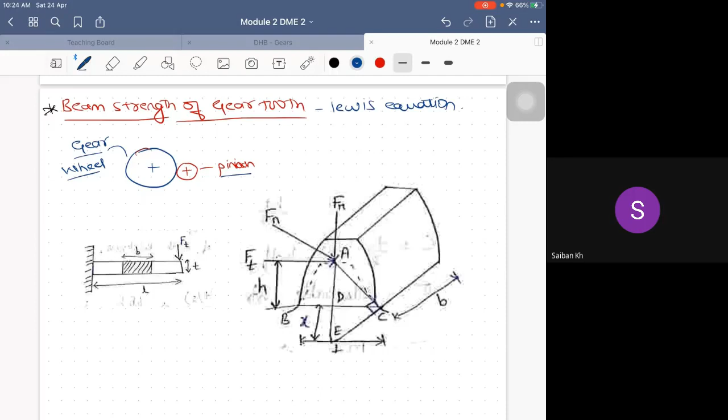I told you there are two different wheels which turn, rotate one another. Those are known as gears, as we have discussed in the last class. The bigger one is called a gear wheel, and the smaller one is called a pinion, irrespective of whether it is driving or driven. Which of these two wheels, according to you, is more stressed up? I mean, more forces it has taken, more load out of these two gears. So whether it is a gear wheel or a pinion, according to you, will be having more impact or more load content? Pinion, isn't it? Because it is small when compared to the gear wheel. If it is driver also, driven also, the pinion will be under more load. So the pinion would take more amount of load cycles. Therefore, all the design calculations most of the time will be based on pinion. Remember this - all the calculations will be based on the pinion wheel since it is taking the more load.

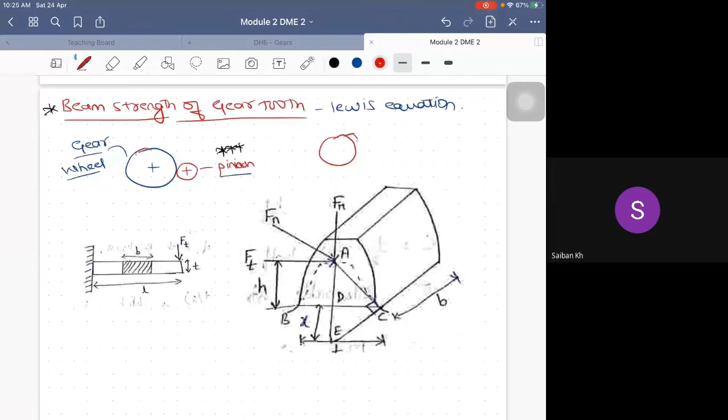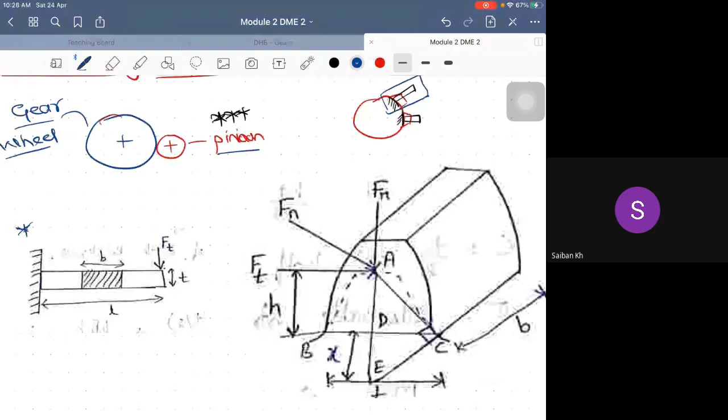So in the Lewis equation, what we will do is, I have considered a pinion. Now I will just draw a pinion like this. The pinion has n number of gear tooths all around it. So while analyzing the Lewis equation, what we'll be doing is we will be analyzing in such a way that every tooth is a cantilever beam. For example, this particular tooth is a cantilever beam, and this particular tooth is a cantilever beam. Every tooth, it goes on for every tooth. Now, what we will do is we will take only this particular cantilever beam and analyze the things. Got it, everyone? So every tooth would be considered as the cantilever beam. That's great.

Now, let us try to analyze the various forces which act on a gear tooth. Suppose this is a gear tooth of a gear wheel, and this is a pinion tooth of a pinion wheel. This is entirely different wheel, and this is entirely another wheel, something like this. This whole sort of thing is a gear wheel, and this is a pinion tooth. Now the gear is pushing the pinion - the force is exerted from this tooth to this particular tooth, like this. So I would take a normal for both these surfaces. What I'm doing is I am taking a normal for these two surfaces. Whatever the force is acting on this particular normal, I would take it as Fn. Since you have studied in MOM also, the forces will always act in the normal direction. That's why the normal for both the tooth profiles - I have drawn a normal along which the force is acting, which is known as Fn, and that particular normal force is this particular thing here, like this.

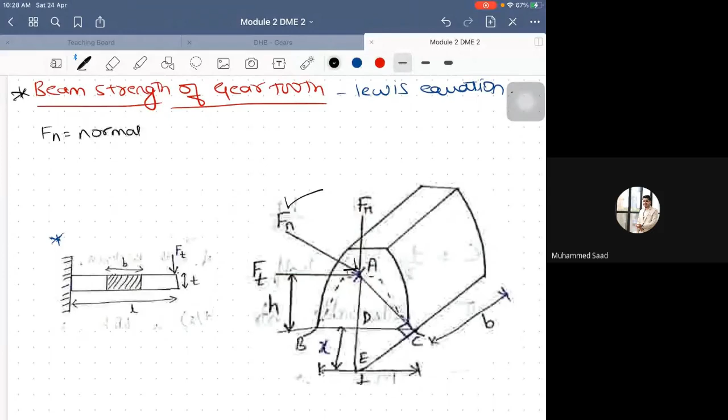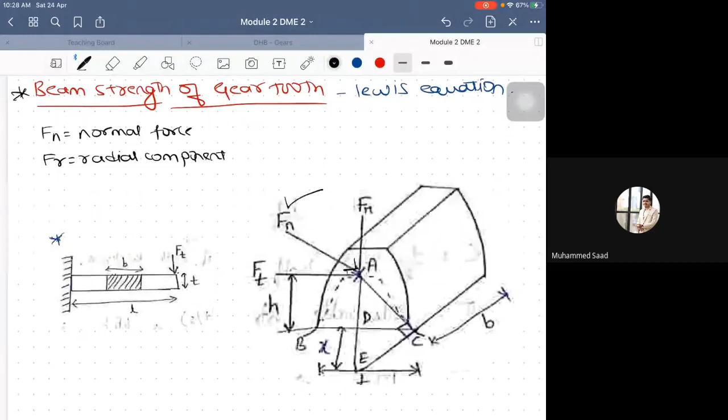Fr is the radial component. According to you, this particular Fr is acting something like this. I would just highlight this. So this particular Fr is acting like this, and your gear wheel is all around like this, correct? And here is the center of the gear wheel.

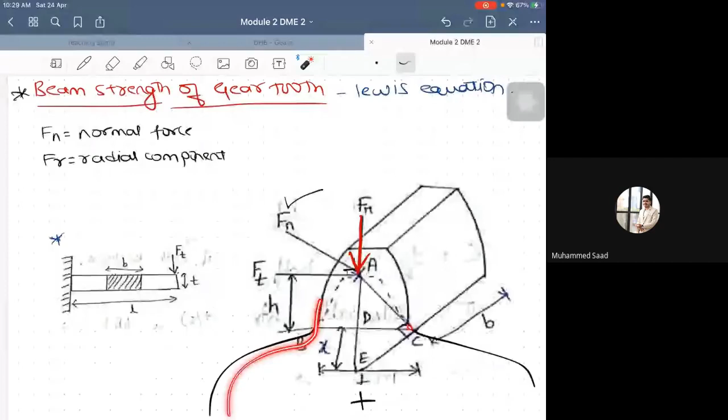Now, according to you, this particular Fr, which is the radial component, is it tensile in nature, bending in nature, or compressive in nature? Just try to analyze the component Fr. It is acting somewhere like this onto the gear tooth, and this whole sort of thing is your gear with a single tooth like this. What do you think? Whether it is tensile, compressive, or bending?

Compressive, very good. So I would take this particular component as the compressive component. Okay, next.

Next is Ft, isn't it? Ft is this particular thing. Now, try to analyze the gear wheel once again, and the gear tooth. So this Ft I have marked here also, you can refer here also. The Ft is here. According to you, the Ft, which I call the tangential component, whether it is tensile, bending in nature, or compressive in nature.

Bending. It's clear, right? Very good, very good. So it's a bending component. Okay, understood all three forces, the normal force, which is being resolved into a radial component and a tangential component, and the nature of these forces.

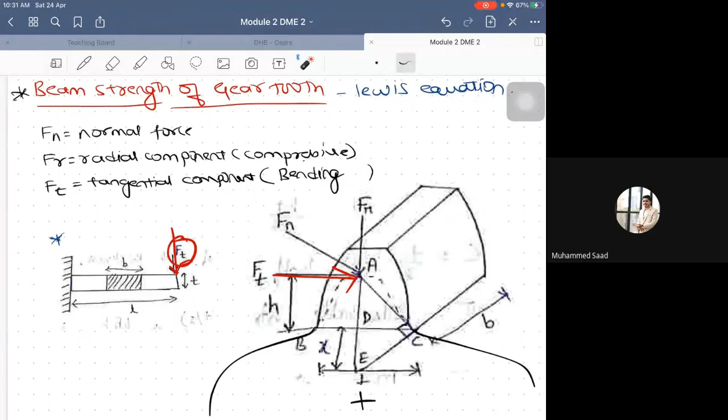So okay, according to that, anyone remember the bending equation, guys? Bending equation you have learned in your MOM, even you have used in your design one also. The bending equation.

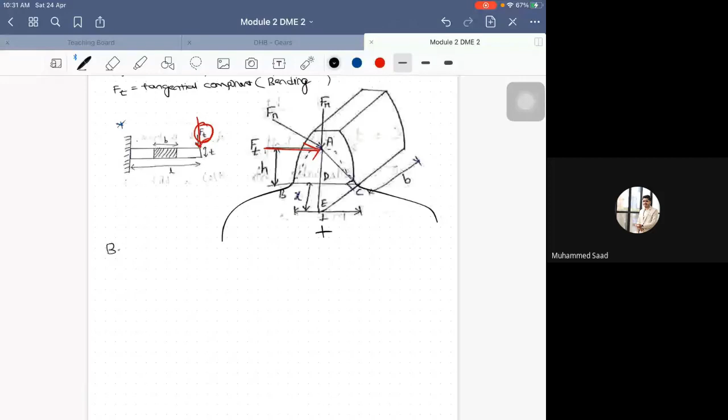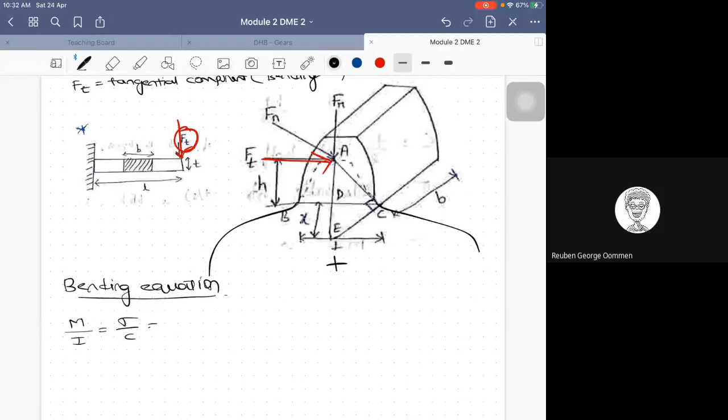Anyone? M by I is equal to sigma by C. Exactly. M by I is equals to sigma divided by C, that in turn equal to... there is one E more component, G theta by... very good, so it is E divided by R. Very good, I'm happy, man.

Okay, now, so what is M? M is the bending moment, the maximum bending moment. I is the moment of inertia. Sigma is the bending stress which is produced. And C is the distance for the outermost fiber. R is the radius of curvature, and E is the elastic modulus. All those different parameters you have already learned about, isn't it?

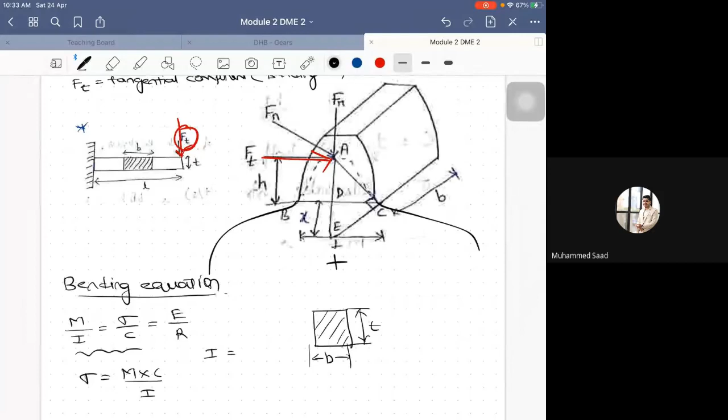Now, considering these two equations, what I will do, I will just write sigma is equals to M cross C divided by I. Now I want to define moment of inertia for base B and height T. How would you define it? I want to calculate moment of inertia for this particular section, which is rectangular in nature.

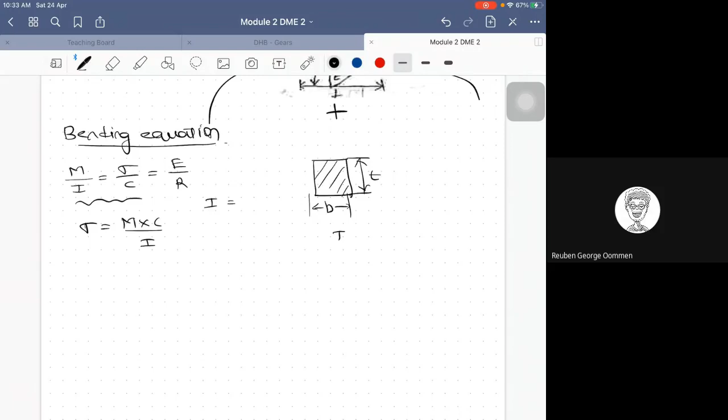bt cube by 12. Exactly. So I is equals to moment of inertia. If I want to define it for this particular rectangular section, it is BT cube divided by 12. Now, what is C? C is the distance of the neutral axis from the outermost fiber, isn't it? So the neutral axis would pass at the center. Now I want to define this particular thing, which is C. Can I write C to be T by 2? Correct? Half of the length of the thickness. Yes, sir. So I would just take C as T by 2.

Okay, now substituting the value of C and the value of I in this particular equation number 1. Just substitute. It would be better that parallelly you solve in your notes, and that is the way it works. Keep your notes in front of you, keep solving along with me, you will be getting involved. Any doubts in solving, you can just contact me in between. It will be better.

So M into C is t by 2 whole, divided by I is BT cube by 12.

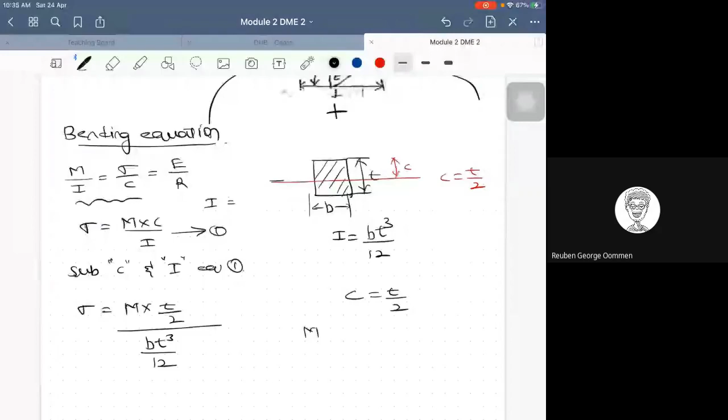Now, I want to define the M. So how would I define M here? Just analyze here, this is the force acting, Ft, correct? And this is the perpendicular distance, which is h, I have written as h. Okay, so how would you define the bending moment which occurs at CB? This is CB, this particular line, how to calculate a moment.

Force into distance, so force into perpendicular distance, correct? Yes. So now, what is the force which is acting here? Ft, sir. Ft is the force which is acting, and perpendicular distance. What is the perpendicular distance? H. H is the perpendicular distance.

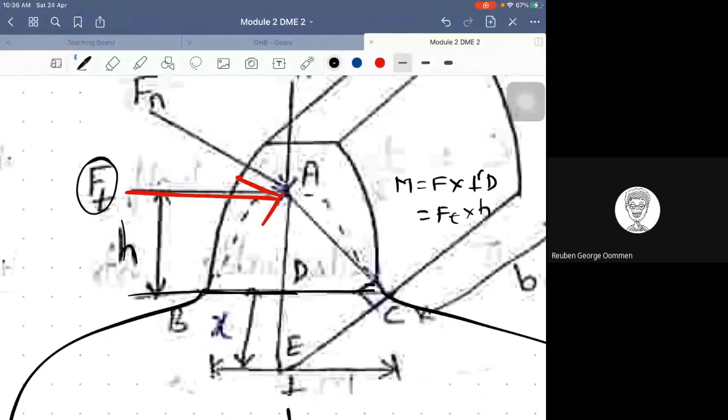It's the same thing I would take here now. Okay, I would take M equals Ft cross H. Good. So now, can I just replace this here directly? M I would take here, and I would replace it to be Ft cross H.

Now, when I solve all this, you can cancel this stuff here. 1s, 6, t goes away, 2 remains. When I rearrange this, what I would get is 6 Ft H divided by Bt square. So this is now sigma. I would take this particular equation as equation number 2. Everyone got this equation? Yes, sir.

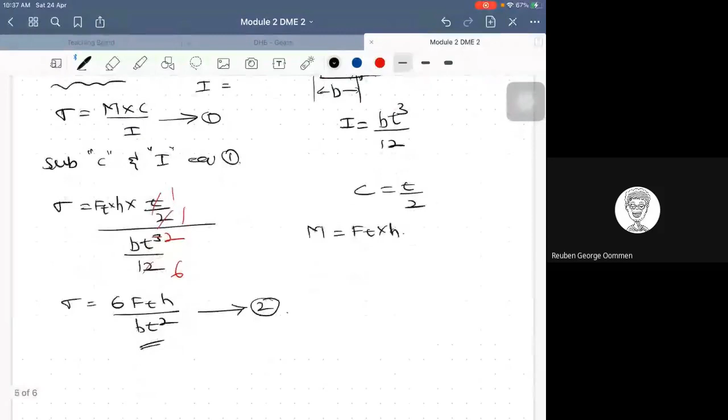Okay, now for this particular equation, I'll take another page. What I'll be doing is extracting Ft from this. Try to extract Ft is equal to sigma Bt square divided by 6h. Am I correct? So for this equation, you just multiply and divide by P.

What do you mean by P? P is nothing but your pitch. So just multiply and divide by P. So what happens here? Ft equals sigma Bt square divided by 6h into P divided by P again.

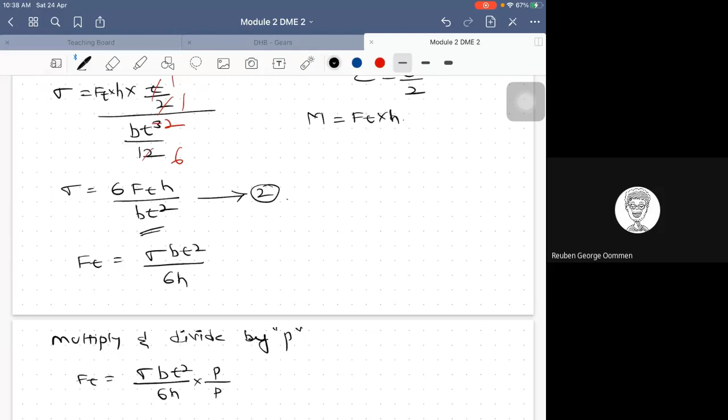Okay, now I'm just rearranging the terms. What I would do is keep sigma B P on one side, and all the remaining stuff T square divided by 6hP in a bracket like this.

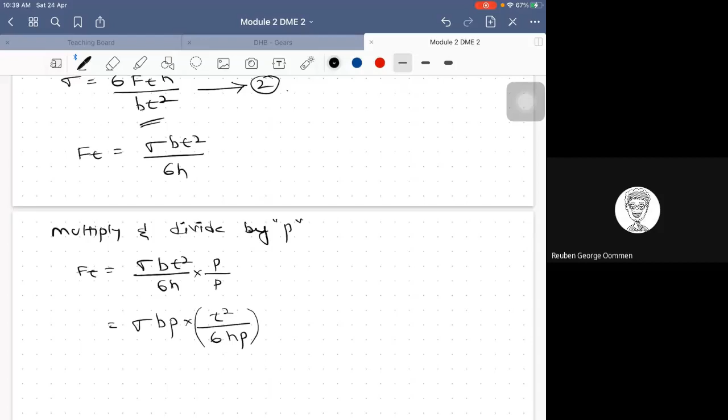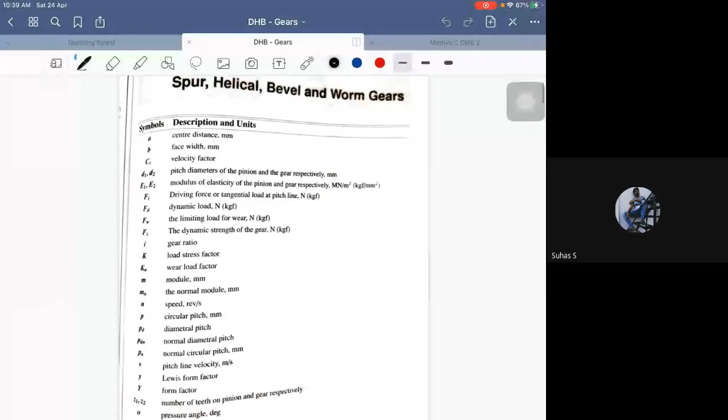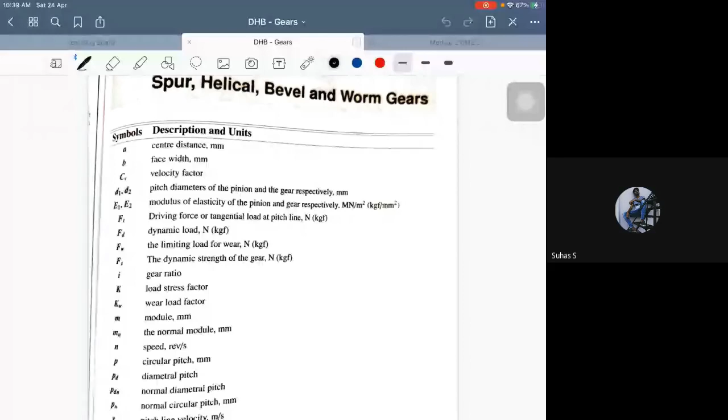Now, everyone have your data handbook with you right now? Yes, sir. Just open your data handbook and look at this particular page. We will get to know the terms as and when we solve more problems. Just have a look, no need to remember everything. At the initial stage of the course, no need to remember everything, and don't be frightened that if you don't know something, nothing will happen. You'll get used to it, be calm and just learn.

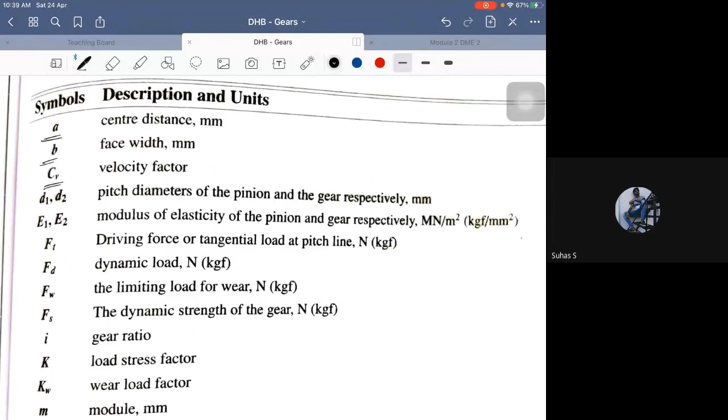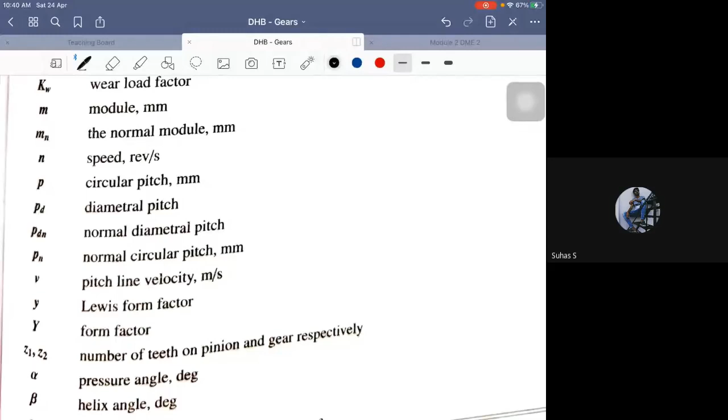Now see, center distance is represented by A, face width is by B, CV is your velocity factor, small d1 and d2 are the pitch diameters of pinion and gear. So kindly read all the parameters listed on the first page, you'll get to know about the parameters, that is my intention. So just kindly read all the parameters in the data handbook for a few more seconds.

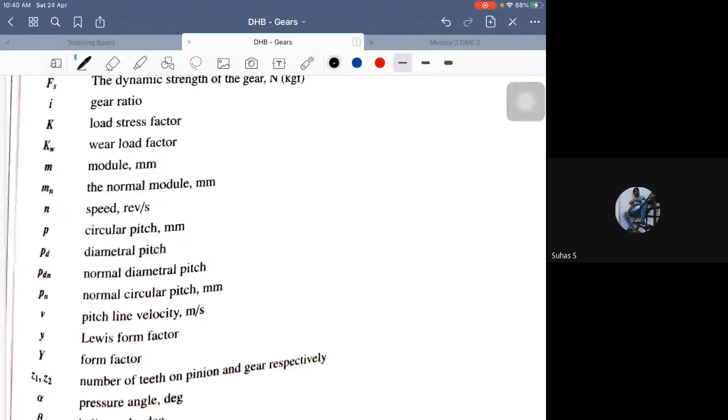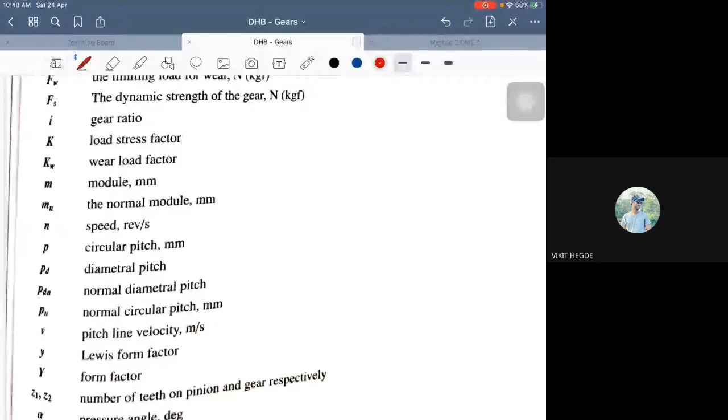Okay, so we have taken P value, isn't it? So where is the P? Can you just identify here the list of parameters given in the data handbook? Can you identify P there? So P is nothing but the circular pitch according to here, isn't it? So it should be in mm, its unit is mm. So P is nothing but the circular pitch, he says.

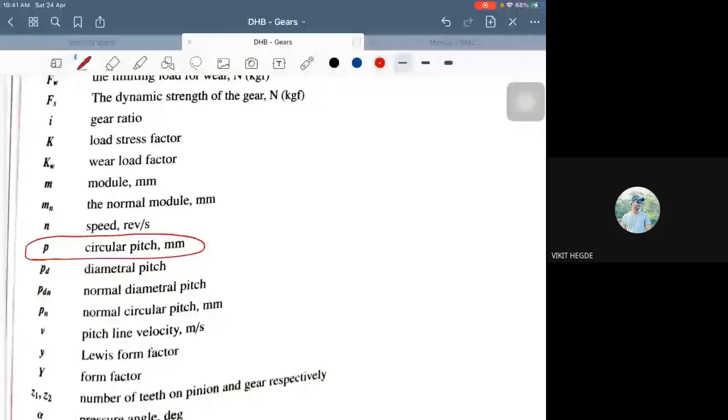Now, let us go further in the data handbook, page number 202. So all the parameters I have given, I told you to just remember all these parameters in the last class. Go to the other thing. Okay, the first, this spur gear details he has given. So in that, many basic formulas, which were supposed to be remembered by you, have already been given in the data handbook.

In that, the first equation says the circular pitch. So what is the value of circular pitch here? Can anyone say me? See, here is the formula. Can I take circular pitch to be pi m? It's available in the data handbook, I hope everyone is having it with you. If you don't have it also, in the Google Classroom, I have shared the soft copies, isn't it? Correct? So from this, can I take the value of P to be pi cross m, pi into m? Can I take it from the data handbook?

Yes, sir. Okay, so what I would do, I would take here: P is equals to pi into m. And again, what is m? Look into the first page and get to know the things. What is m there? Module. It's a module, right? So just substitute the things back here.

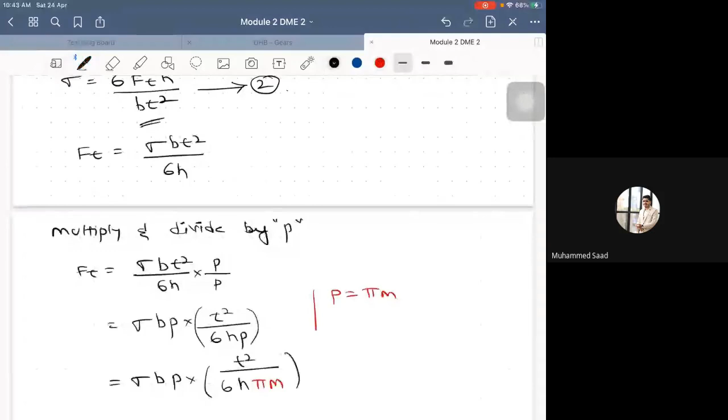Sigma B P, cross, now T square as it is, 6H. Now P, I would replace it as pi cross m. Any difficulty up till now?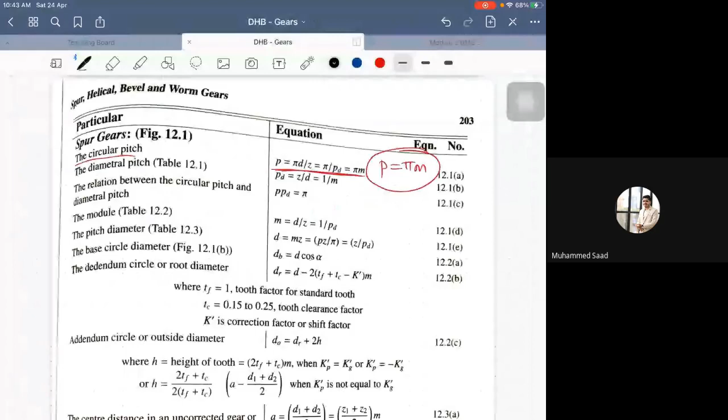No, sir. Good. Now I want you to search the first 2 pages of the data handbook, and identify this particular equation here. So, only this part. Can you find anywhere the highlighted portion in your data handbook, the expression which matches the same? Just search and tell me.

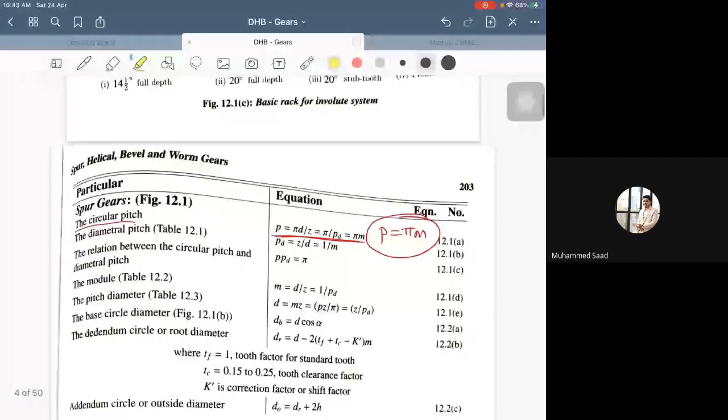Y is equal... Yes sir, page 204. Page number 204, okay, this is how much? 203, and here it is 204. Correct, where is that particular expression which I've just showed you?

Lewis equation, sir, it's a Lewis equation. Yes, it's Y, Lewis form factor. So here it is - can I take t squared divided by 6 h pi m to be small y, which is known as the Lewis form factor?

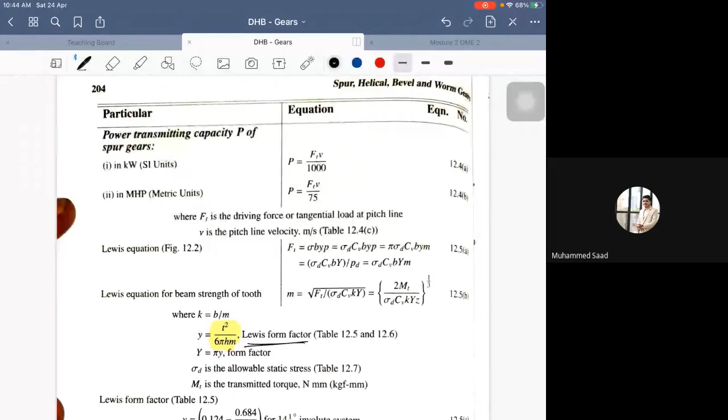Yes sir, same thing I will be doing here. So that is equal to sigma b p cross - what I have done is I have taken t squared divided by 6 h pi m to be y, which is known as Lewis form factor. From where have I taken it? From equation number 12.5, page number 204.

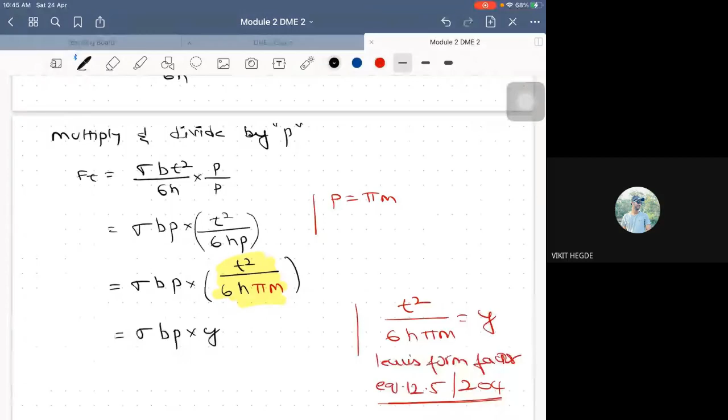Now substituting in this, what would I get? I would get it as y. So what is the tangential component? It is sigma BP into y.

Check this particular equation - can you find it in the data handbook once again? Yes sir, equation number 12.5a, again same page number 204. So it is somewhere here, correct. And this ends your particular derivation.

Any doubts in this particular derivation, guys?

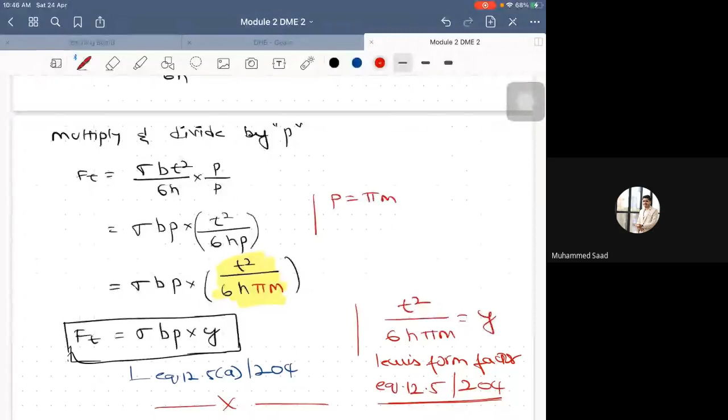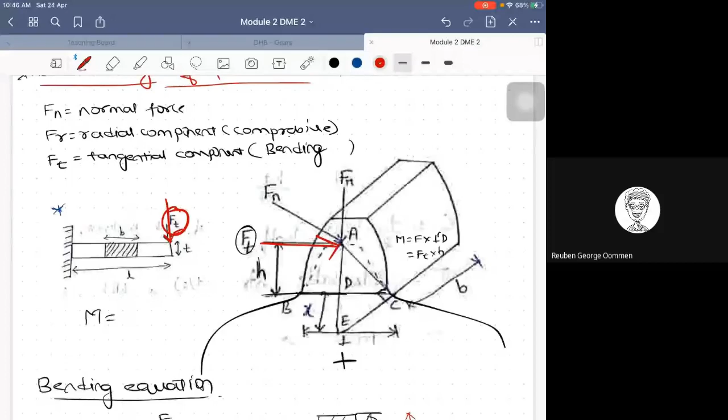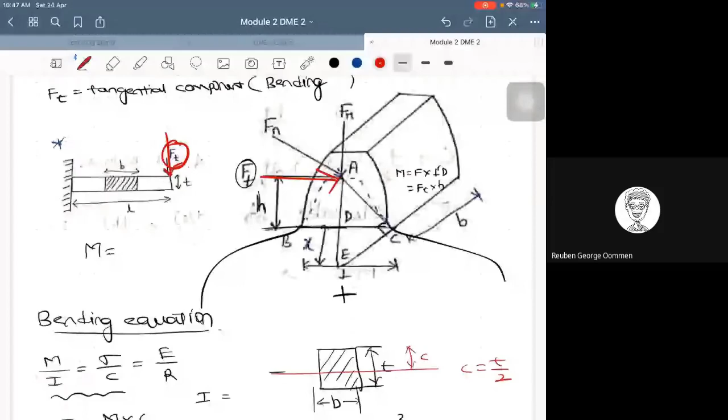Sir, could you show the diagram? Yes, sure. No need to copy it down - I'll be sending these notes neatly written. But I want you to solve whatever you're solving in a derivation. Leave the space for the diagram because it takes a lot of time, so every student can finish it in class. Leave the space for it and I will definitely give the notes. But I want you solving the derivations and problems along with me.

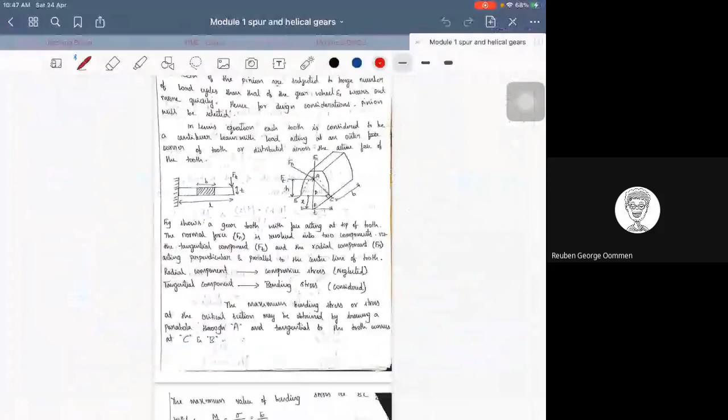Now let us look into some of the assumptions for this. So while deriving the Lewis equation, some assumptions are made. Can someone read the first point?

Girish, read the first point there. Assumptions: the tooth is assumed to be a simple cantilever beam.

So the tooth is assumed to be a simple cantilever beam - I have explained this to you. Next: the tangential component of force is uniformly distributed across the face width. So if the tooth is something like this, this is your face width. He says it's not a single point load, rather it is spread across the face width uniformly.

Next point, Girish: the effect of the radial component, which produces direct compressive stress, is neglected. In the course of the derivation, have I concentrated anywhere on the radial component? We only calculated Ft. So the radial stress Fr, I told you, this force is neglected.

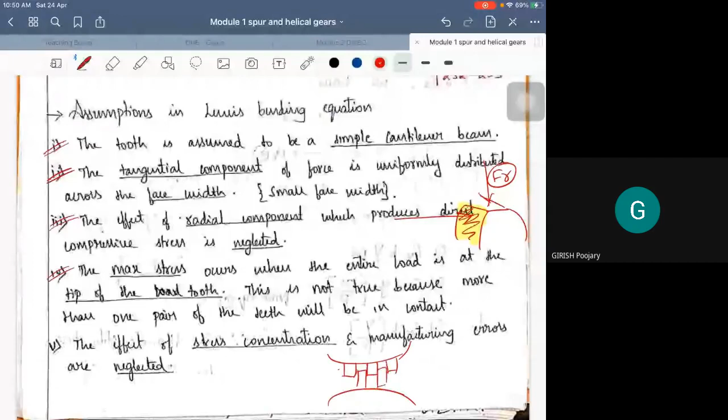If I closely move this, what happens - the contact point for the first engagement is somewhere at the tip, for the second it's somewhere in between. So I cannot generalize that it would always act at the tip of the tooth. That is what he is saying.

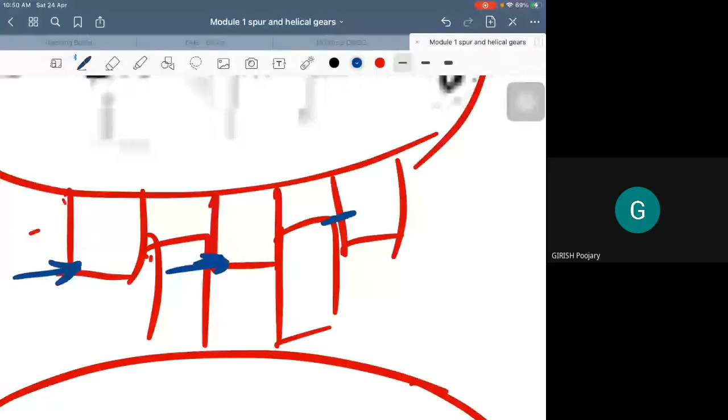Next one: the effect of stress concentration. Girish, complete this last point - the effect of stress concentration and manufacturing errors are neglected.

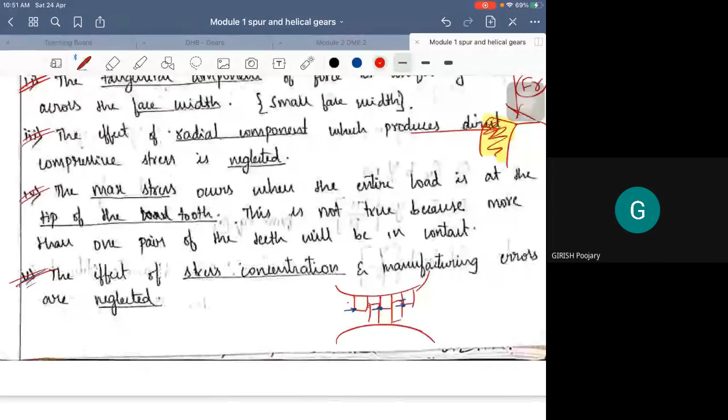Stress concentration affects your design study because of the notch, the keying, whatever you do - there would definitely be a stress concentration. Even the gear has stress concentration, but all those factors are not considered while deriving the Lewis equation. Even manufacturing errors and compensations are not considered while deriving the equation for Ft in the Lewis equation. Is that clear? Any doubts in this particular derivation?